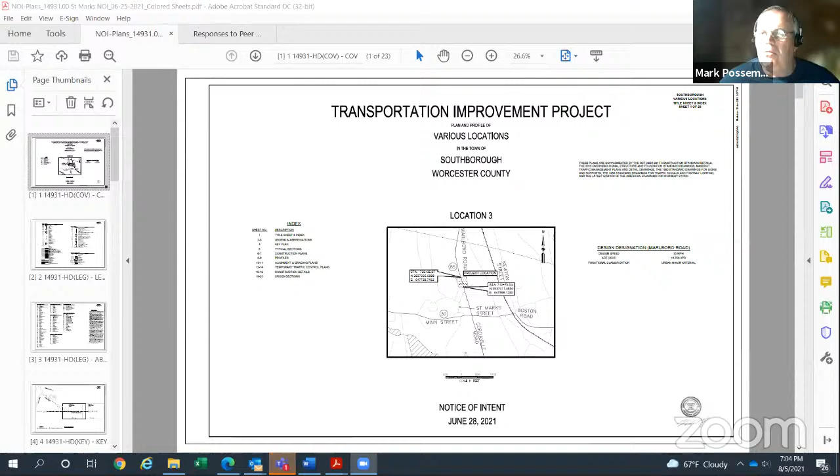Good evening, my name is Dan Cannata. I'm an environmental scientist at VHB here on behalf of the town of Southborough. This is a notice of intent application for work proposed on Route 85, or Marlboro Road. Work is going to be along about 600 linear feet of the roadway and the roadway layout, in the vicinity of the St. Mark's School. Work involves milling and overlay, repairing the roadway, installing sidewalks, and additional pedestrian upgrades and drainage upgrades in the area.

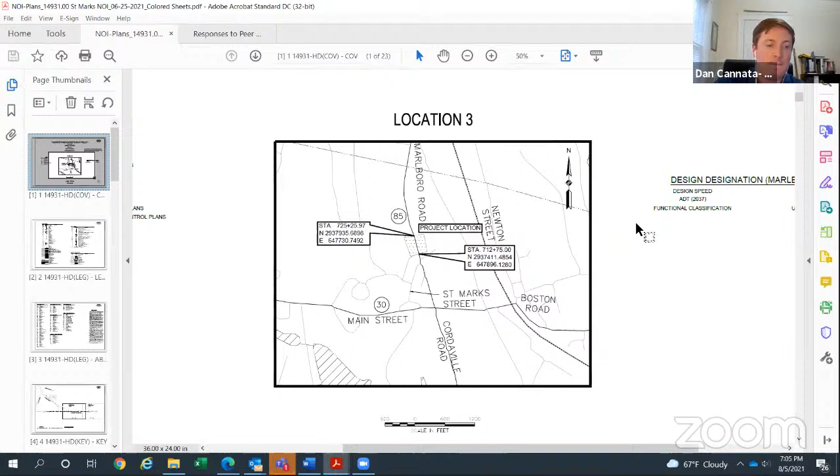The work is going to be required in both the 100-foot buffer zone to bordering vegetated wetland and is also in some areas encroaching into the 20-foot no disturb zone. This is an area of shrub scrub and forested wetland that abuts an intermittent stream beyond the project limits.

I have Amanda Bazinet from VHB. She is going to discuss some of the particulars of the project, and we will also get into regulatory compliance after that. Amanda? Hi, Dan, can you go to sheet 6, please? That shows the underground structures, the pipes and everything as well.

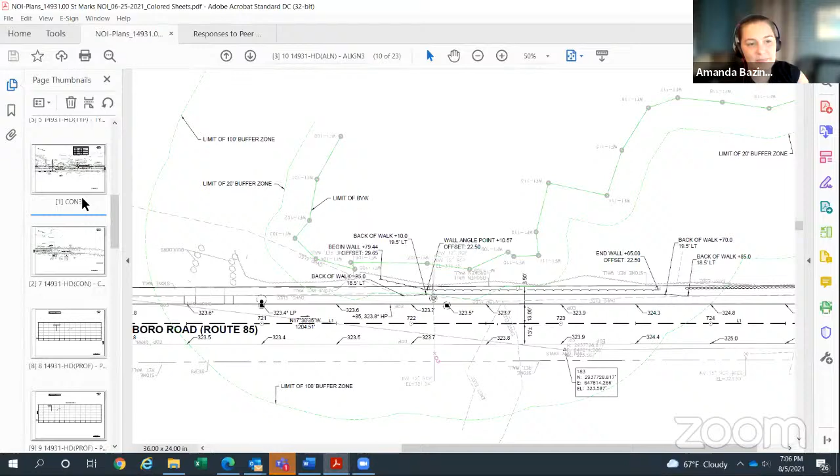Yeah, just click on sheet 6, back a couple of sheets. So as Dan mentioned, we're making improvements to approximately 600 feet of Marlboro Road, between St. Mark's Street, where it's being relocated, and to the north, the west driveway of the St. Mark's School. The majority of the area through here is recreational fields, some landscaping. We are going to be milling and overlaying the roadway, which currently has a width of about 22 feet, one lane in each direction. Right now, there are no sidewalks on either side of Route 85 because of the adjacent project, History Walk, that this is kind of an adjunct to.

The intention is to install a walkway that will vary in width from 5.5 feet to 6.5 feet, including the curb, along the west side of the roadway. The sidewalk will increase the impervious area within the project limits.

It will be a relatively minor increase of approximately 1,490 square feet within the 20-foot buffer zone, but only 100 square feet of that is going to increase the impervious area. So the majority of it will be working in already disturbed areas.

As part of this project, we are also installing new drainage structures, tying into the existing pipe that goes from the drop inlet on the easterly side of Marlboro Road, and making improvements to the existing outfall on the westerly side of the street, including installing a new flared end section and a new riprap pad sized as large as can be accommodated without impacting the wetlands themselves.

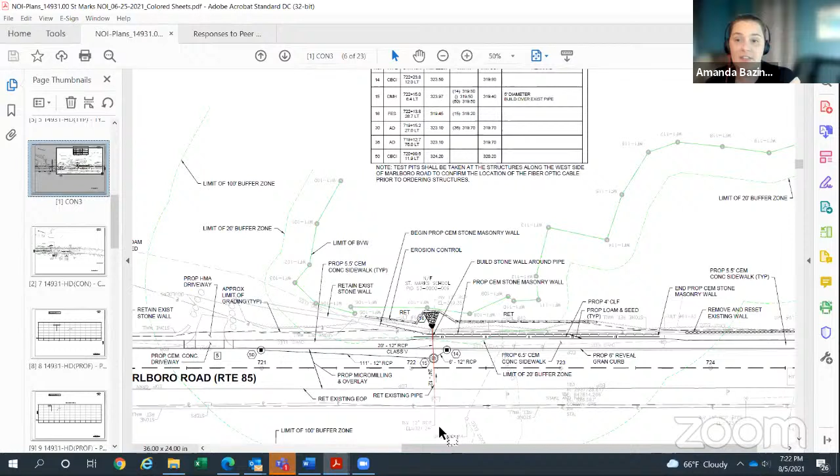The other thing noted out there on the St. Mark's property was an area of dumping of lawn clippings, which I presume St. Mark's is going to rectify, but that may create an area that could use some revegetation, and maybe that could be the mitigation area if one is needed. We were advised that St. Mark's maintenance and facilities has been notified of the issue with the clippings, but we'll take note of that as far as potential for mitigation.

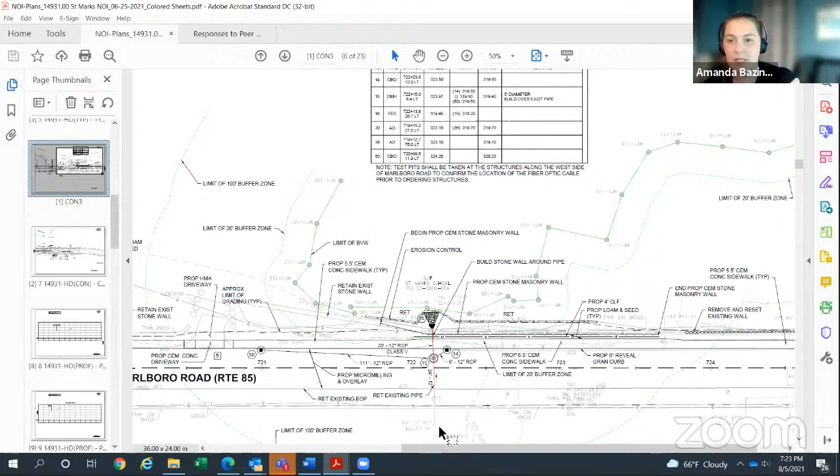Where were those clippings being dumped? I believe Matt had noted it was between flags 100 and 101, which are on the upper leftmost corner of the BVW, right next to the shed field, beside the baseball field. Okay.

Maybe I'm just not seeing it—did those rain gardens end up making it onto the drawing? Can you zoom out a little bit, Dan? So there are 2 rain gardens as part of the larger History Walk project. This was a bid alt because there were concerns about whether there would be sufficient funds to construct all of the sidewalk and roadway improvements. So when we filed this, we focused on this area as part of the filing instead of submitting the whole larger plan set, because this was the only area that had jurisdiction, had anything jurisdictional on it.

But if you look at the area about 50 feet beyond this heavy black line, which is the limit of this particular portion of the project, there are 2 drainage structures. Those are actually located in what is a rain garden, and it connects to the south. There is another rain garden being installed in the park on the other side of the new St. Mark's Drive. The detail was included because you can see the outline of that rain garden here, but none of the rain garden flows are being directed to this jurisdictional area.

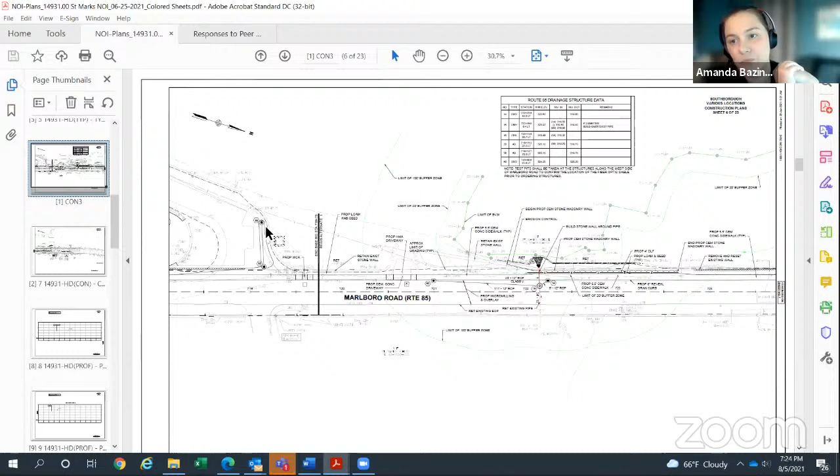Or any other comments from commission members? The riprap in the head wall is on the other side of the masonry wall, which I think is about 8 feet tall, give or take, right? I am not 100% sure on the height of the wall.

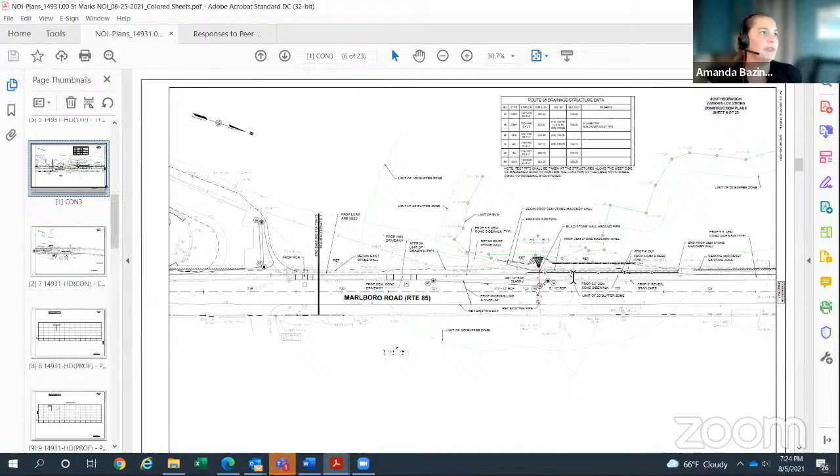I apologize, I'm just pulling up the sections to confirm. So the 8 feet is actually the overall height, including the 4 feet of embedment. Oh, okay, I was just trying to figure out how DPW would get out to maintain that if it was surrounded completely by the wall. Dan, could you please go to page 21 on the plans?

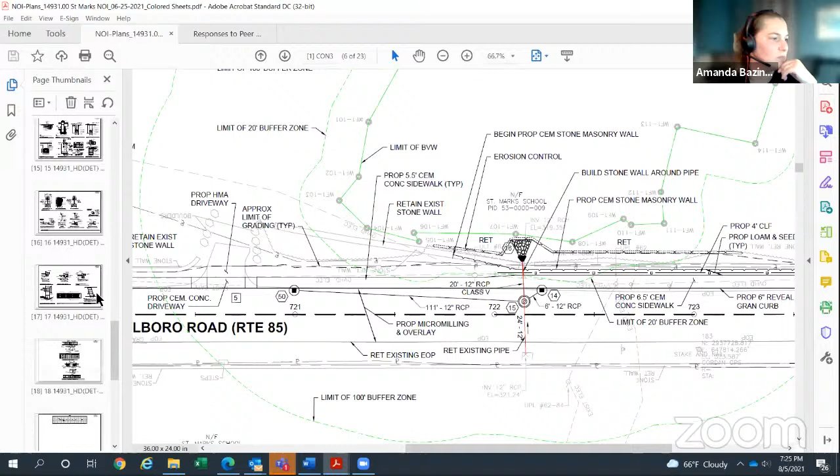So here you can see the cross-section view of the wall. There is a 2-foot level, and as you can see, the overall height is 8 feet from the top of the wall to the bottom of the wall. You have 4 feet of embedment so that you don't end up having issues with frost and everything won't overturn. So from a maintenance perspective, they're going to be able to walk along the frontage of it if they need to access it to do any repairs or cleaning as necessary.

And the drain manhole it dumps into, none of that's in an oil water separator or anything along those lines, right? No. We did discuss with the town whether or not we should be doing something like a Stormceptor system, but right now the town does not have any equipment or a vac truck in order to maintain something like a Stormceptor. So something with greater treatment wasn't considered at this area.

Bummer. Okay, thank you. And there are hoods on both of the catch basins before they tie into that manhole. Any other comments, questions? No? Okay.

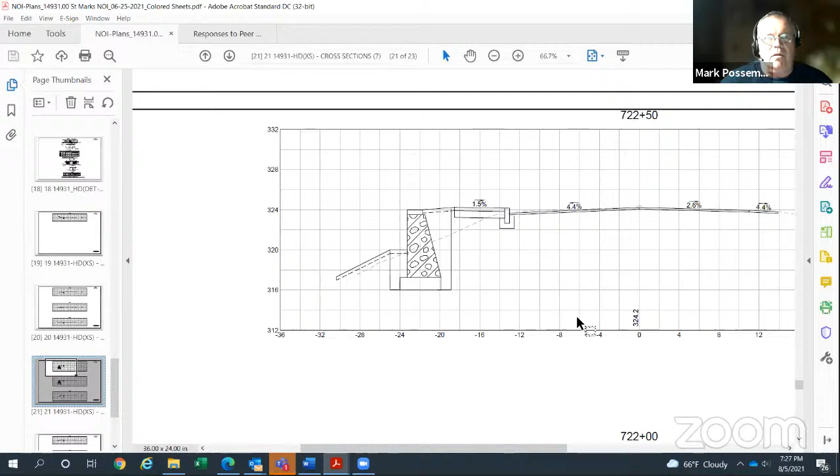Mark, yeah, Carl, are we still going to request some type of mitigation? You were summarizing, so. Well, we put it out there on the table, it's up to the applicant to come back with it. You were summarizing the things that need to be done. Yeah. Thank you. Okay, sure.

One quick thing, Mark, before you go, is there going to be any staging or stockpiling for this project? You mean for the construction itself? So it has been put out to bid, but it is not currently going to go to construction. Obviously, we still need to get the permitting approval. They will be starting construction, I believe, of the park and the rest of the history walk. I don't know, obviously when they get approval it will determine whether or not they can begin this. I don't know where their staging area is going to be, honestly, but we can certainly ask if anything has been decided. Since it's larger than our jurisdiction, if they could propose outside of the 100-foot, that would be ideal for most of it.

Jerry, we can hardly hear you. We see your lips moving, but I'll speak louder. I'm sorry, I was just thanking you. I don't know if it's just me, I could just barely hear you.

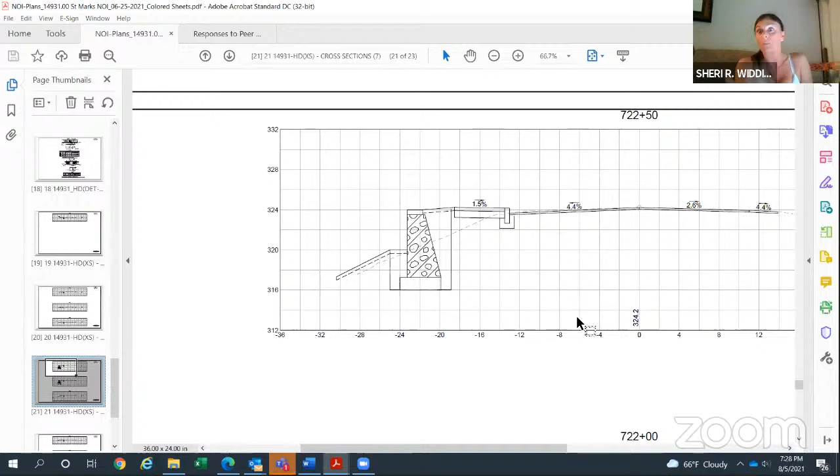If they could do it outside the 100-foot buffer, any of the staging or stockpiling, that would be favorable to me. Or we can condition that it has to be outside the resource area. I'd like that too, but... There you go. And like you said, I think that can be accommodated because there is more work going on in this area.

Hey, Mark, one late question, if you don't mind. We got the DEP number, did we get any comments from DEP on this? No comments. Okay, thank you.

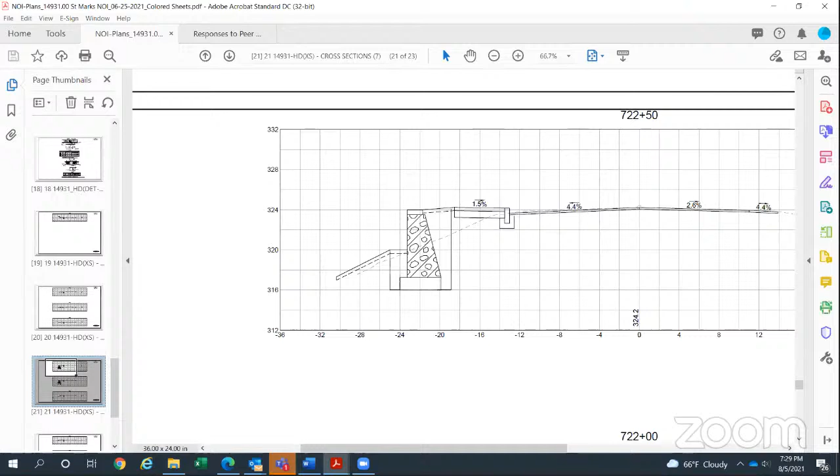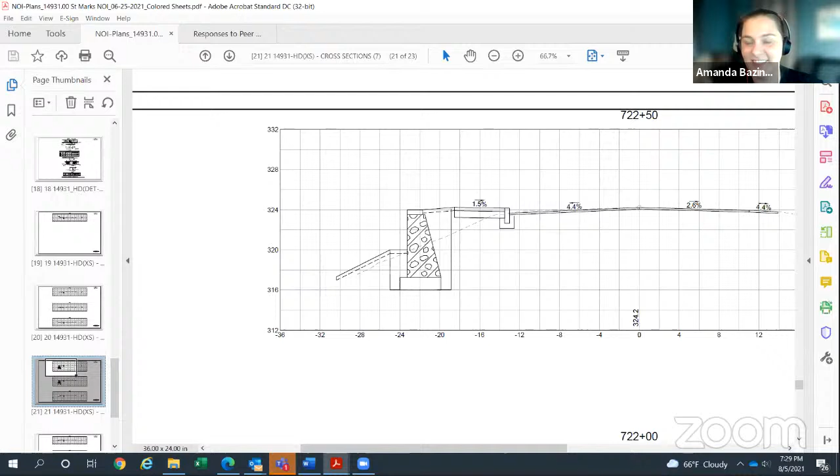All right, so we're going to continue this. The next meeting date, okay, which is the 26th. I think it is, Dan, you good with that? Yes, I should be available. All right, so do I hear a motion to continue this to August 26th?

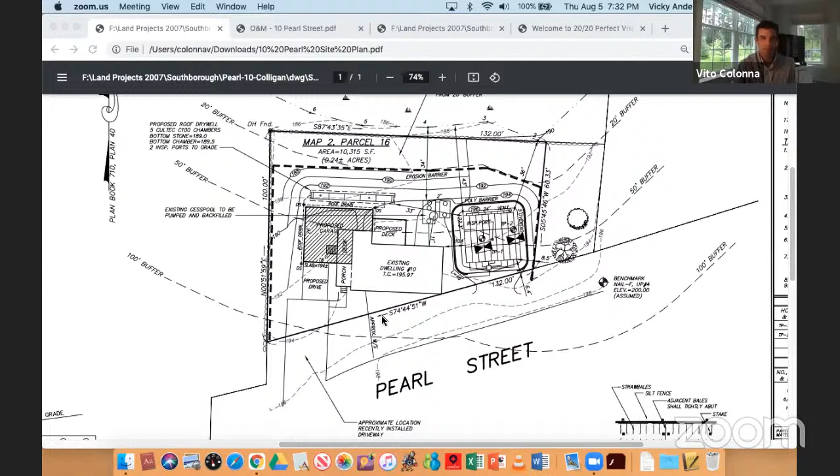I think if you remember during the last hearings, there was discussion about the inner 20-foot buffer where there was some trash and debris to be removed. So that area does get a little work in it, but we have set that erosion control essentially right at that 20-foot line. The only other work proposed would be to extend the drive up towards the garage, making that connection from Pearl Street up to the garage. I think that's pretty much my presentation of it.

So this was a septic system that couldn't go on the side of the house where the garage is because the soils weren't suitable. Right, and there wasn't enough space actually on that side to fit it over there. Yeah, you can kind of see the size of that septic wouldn't fit in there with setbacks to boundaries and foundations and such.

Was this a 1-car or 2-car garage? It would be a 1-car, that's just 12 feet wide. It's 16 from the porch to the corner here, but then the driveway is about 12 feet wide. So you'd fit a single bay, unless they could squeeze two, but it'd be really tight.

And I just saw the hash marks, I wasn't sure what happened inside the building. Yeah, I think the intent is it would just be a single bay. And they wanted to have access that wraps around the back of the building here because there's a walkout, not a true walkout - it goes down a couple steps and they get water in there. So they'd like to have basement access through the back of the garage, with stairs in the back that would go down into the basement, so you have internal access rather than going around the back like that.

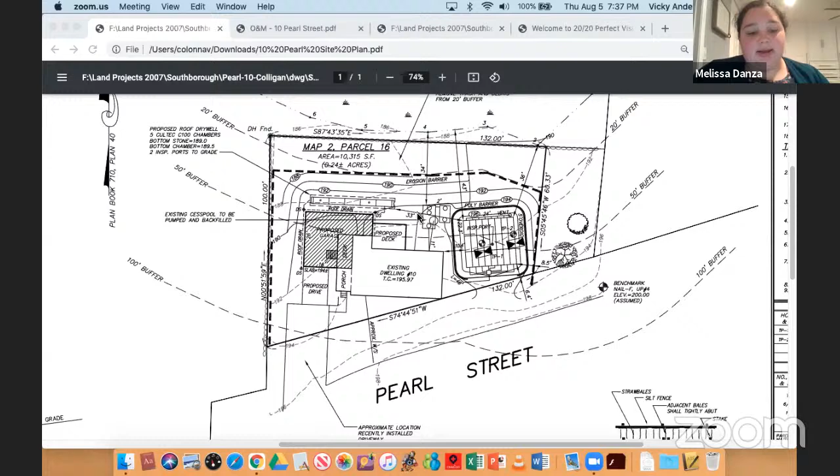Issuing something that's not required seems a little odd to me, but you can just make a finding of fact saying that the commission agreed that a stormwater permit was not required instead of issuing a waiver, if that is more agreeable to the commission.

I'm more comfortable with that. Okay, otherwise I think we're going down a slippery slope. Understood. So I'll just state that given the septic is exempt, there are two separate projects.

Is everybody else okay with that sort of positioning? I agree.

Jeff, were you raising your hand? It was behind your name. Oh, thumbs up. Okay, thumbs up. Sorry.

Oh, you know, we were in person one time. Now we got to get used to being virtual again. Yeah, so alright, so...

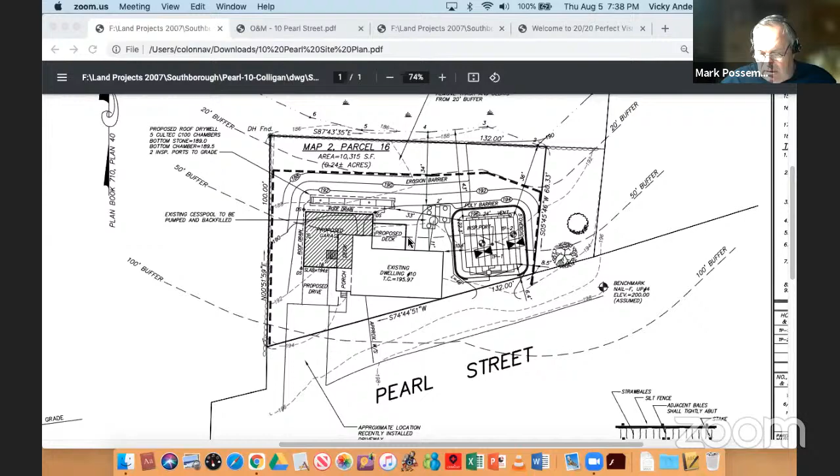So who would like to make the motion? So moved. Are we just, what is making this motion? Motion to close first?

So we'll do two, motion to close and then motion to issue. Okay, so the first one is a motion to issue the amendment as the applicants requested. A motion to close the hearing. I motion to close the hearing. Okay, I second. All right.

All in favor? Watson, yes. Wittes, yes. Guyer, yes. Pete, yes. Gregory, yes. Casamano, yes.

All right, so now a motion to issue the amendment with the findings of fact as we discussed. Yes, that motion is now on the floor. So you hear somebody voting to move it forward.

So moved. Is there a second? Second. Okay, all in favor? Watson, yes. Guyer, yes. Pete, yes. Gregory, yes. Wittes, yes. Casamano, yes.

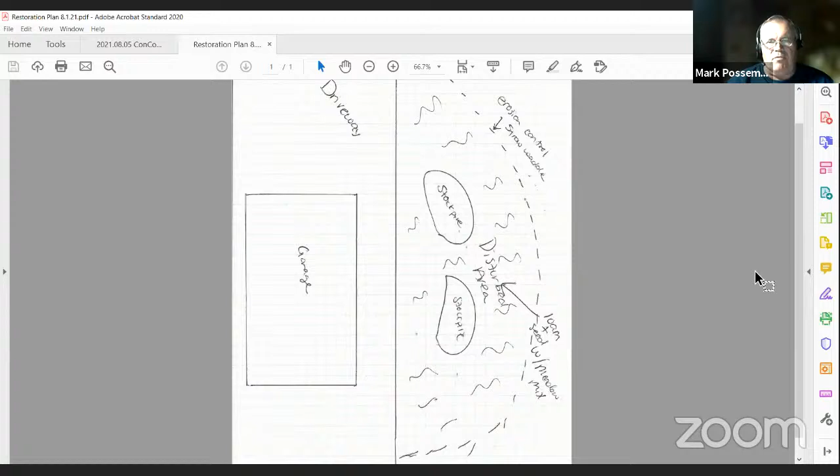Yeah, I would say, to Melissa's point, it would be good to have some sort of a narrative from you, basically writing down what you're telling us verbally now, so we've got some narrative to go by. I can make some revisions and put it on another drawing or this one and email it back to her so she has it. Yeah, I think that would be good, so we've got some form of reference here, so we can understand.

Other commission members' comments, questions.

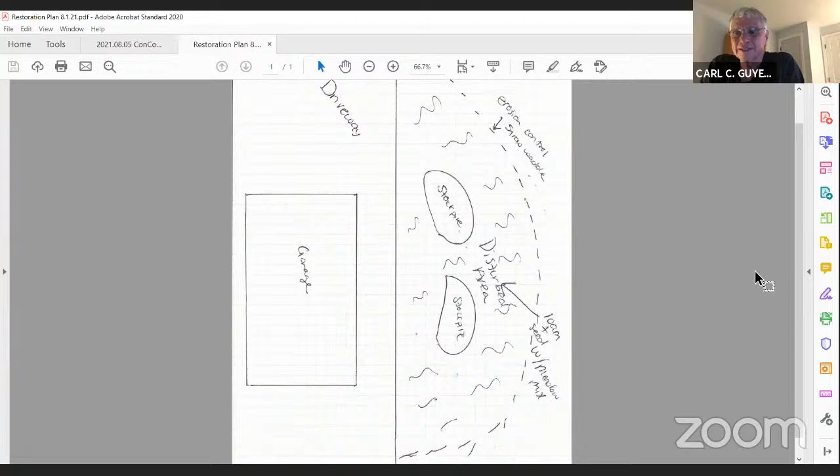Yeah, the knotweed battle is tough. But if you're going to do that, you probably would want to go soon with the knotweed, because it probably flowers towards the end of August. If you're going to take it out, probably take it out now. That would be best before it throws seed all over the place.

Rush, you went off mute. You're going to say something? I was echoing Carl's thoughts. It certainly makes sense to get after it sooner than later.

Also, since we're on knotweed, I've been trying to watch for that guy in Mount Vickery, Chuck Black's kid, whose backyard we permitted, to see how that went. He was going to dig it out, so I'm very curious about how best to battle this.

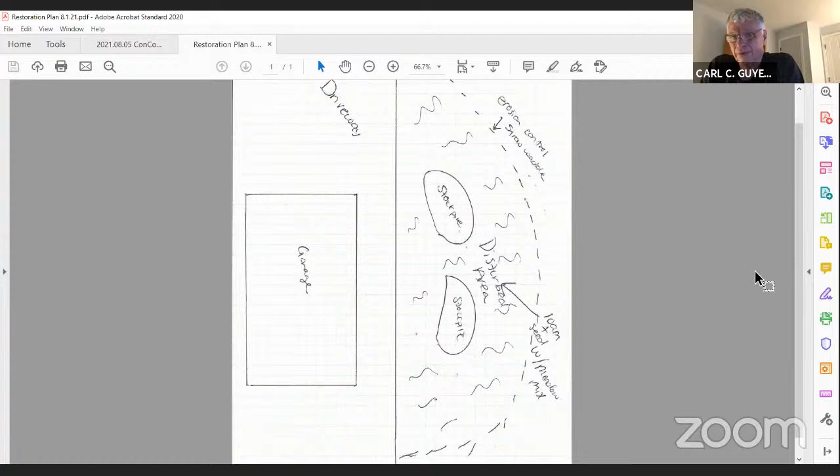And yeah, knotweed is wicked. It is very hard to eradicate.

The state comes by and mows that area, so I think if we get some good meadow mix established this fall, come next spring they'll be handling it. They've already come by once this year to mow.

Like I said, I know it's been over there for, I don't know, 15 years, and it's basically stayed in that corner. It's not like it's gone all the way down to the trees or up to my house or anything like that.

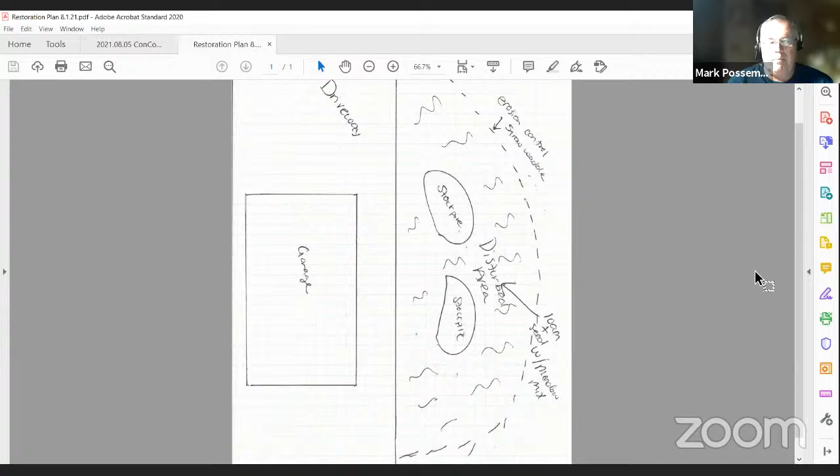Well, you have another 15 years and it might get there. Who knows? Maybe.

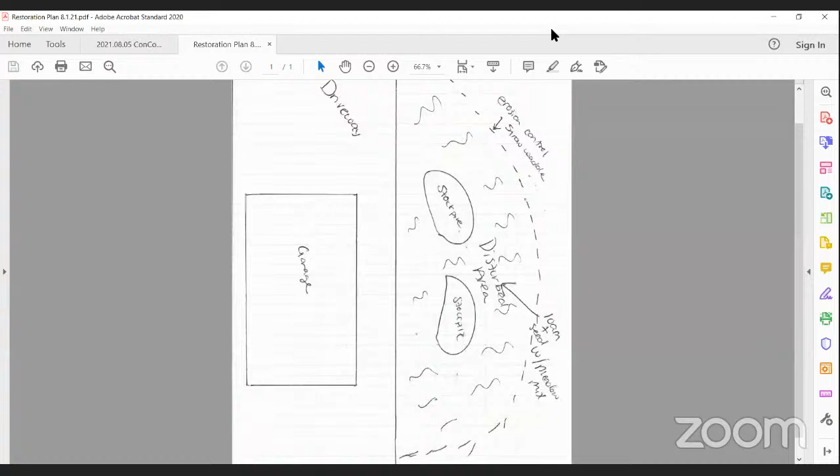All right, anybody else have any comments? No?

All right, so Chris, I think what we're asking for is some narrative of basically what you verbally presented here tonight. If you could get that in writing in some form and get that back to Melissa. Okay, will that have the dimensions? I can put some circles. Yeah, if you get your tape measure out or something and give us some distance references. Sure, great, thanks.

Okay, is that on this one? Thank you, guys. All right, thank you, Chris.

All right, next up is 155 Main Street, clearing of debris within jurisdictional areas. Melissa, you have an update on this, right? Yes, myself, Carl and Matt went out this week, and I think I will let Matt earn his keep and discuss what he found.

So as Melissa said, we met out there with the owner, and looked at where the impact disturbed areas were, brush piles, things like that. I did a cursory inspection to determine where it appears the wetland boundary would be.